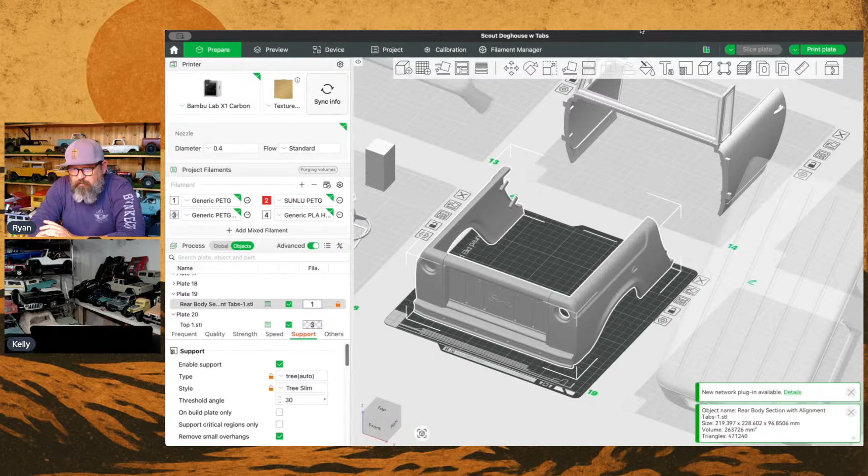I'm just going to start a print. You guys, let me configure this so I can share with you. Share screen. All right, cool. So you guys can see what I'm doing. Awesome. And it changes. So I'll be able to see your comments in a minute. This won't take me long to get it started.

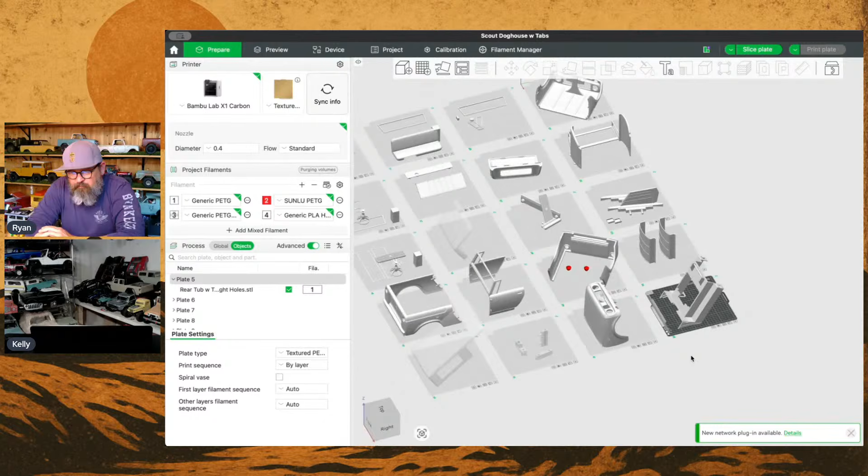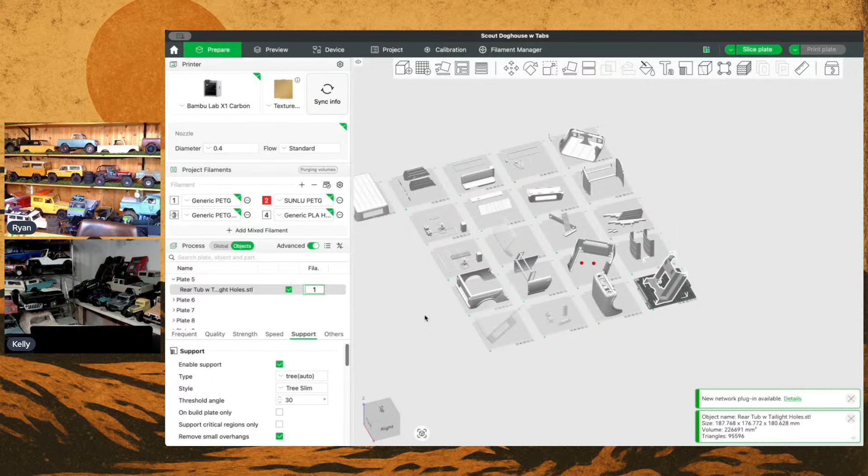And I've got this project all laid out. You can see what's happening. And this is what's next. It's this one. And I got it oriented the way I like it. And I'm going to check and make sure I'm on the material that I want, which is just regular PETG. And then I'll take you guys through the settings a little bit. On an interior piece like this, it's not as important, but you can see when Kelly and I were talking about the orientation before, so you guys still can see what I'm doing.

Yes, awesome. So I've got all this opportunity to see what's going on. So if I look at, this is the plate that's selected. I've got the support set to tree, auto, slim. And one thing you want to do before you set off on a big, long print is see where you're at on all your stuff. So I'm just going to go look at quality real quick. 0.2 layer height, that's fine for this. And I'll look at my support here in a second. I'm not doing any ironing or anything crazy.

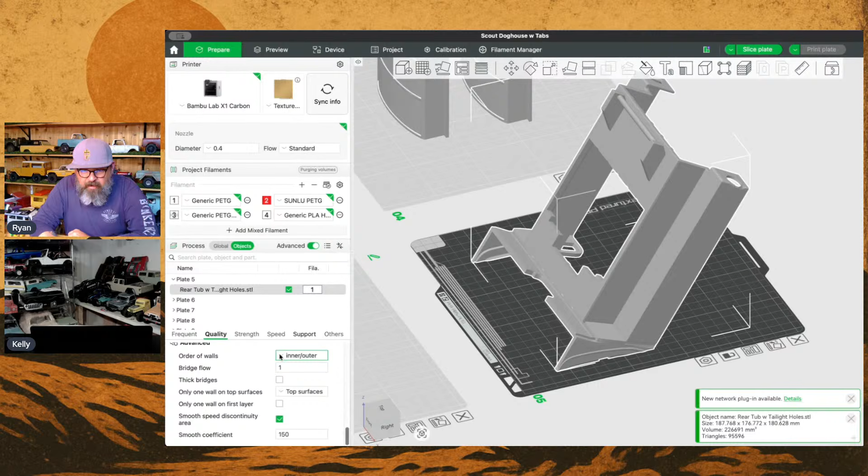I am going to change this from inner/outer to outer/inner. And I'm going to go to strength. And this is just me checking things out. And part of the strength is where you're also going to tell it what kind of infill you're going to want. And so I'm doing aligned rectilinear now. I used to do grid or this rectilinear here, but I'm doing aligned rectilinear now, and things seem to run smoother and a little faster. And that's the infill pattern, and the infill density is like the default 15, which is fine.

So I'm clicking off of this. I never mess with the speed. It does what it does. Wall loops of 2, wall thickness of 2 is plenty because that really is 2 on each side. So that's 4. I've done stuff where I've experimented with that and it makes it heavier if you add. So I don't need to do that. So yeah, I've looked at quality, strength. I don't really need to look at, but we will. And it's telling me what I want to know about the infill and the pattern that I've chosen.

There are some things like overhangs you can look at, but that's going to be in our other settings. There's so much you can do with these, but generally the defaults are fine. So support right here: tree, tree slim, remove small overhangs, support critical regions only. There's all kinds of stuff you can click here.

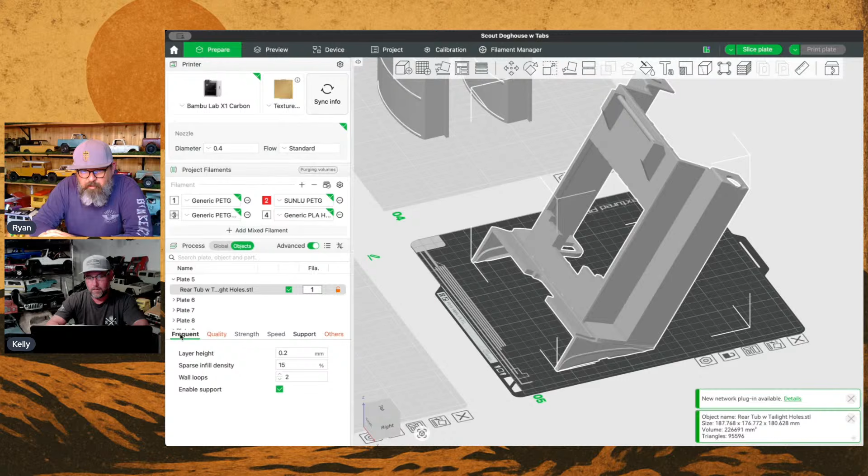So wall loops 2. I've done enough stuff that it gives me my own little tab now, stuff you can look at. But yeah, so this is ready to rock. I already know it is because I've printed multiples of these. That's what's kind of nice about the project and having it like it is. So we've talked about this before, but I could generate 2 different kinds of supports and see how much it's going to cost me in time and money. And we'll do that just for giggles.

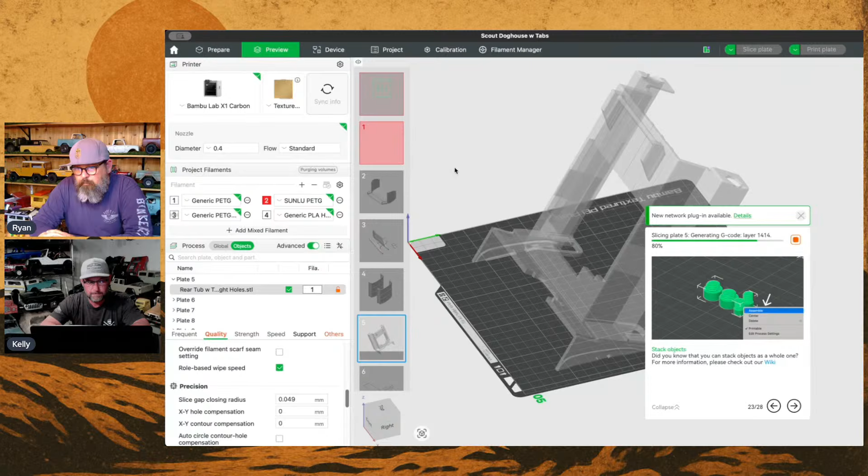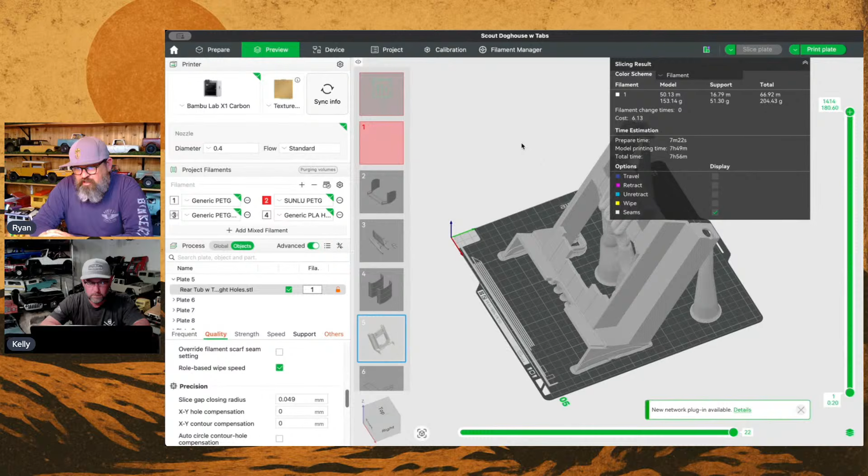Because of AMS and multiple reels of filament in here, I'm able to map out the filaments if I want. So this piece is $6, 8 hours. And I'm using trees, and trees seem to be just fine most of the time. Now, sometimes if you're having trouble with bed adhesion, I will do the other types of support because it will hold it better, but you also are fighting a heat soak sometimes as well, that depending on what's going on could distort the print. So, all right, remember that: $6, 8 hours.

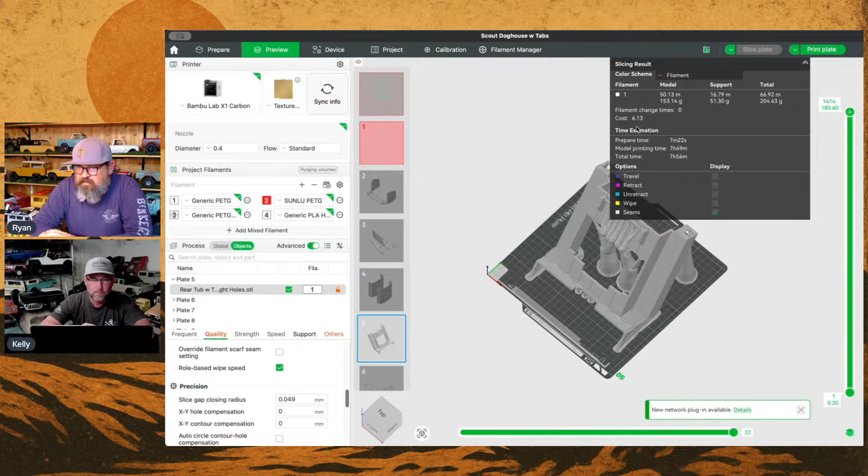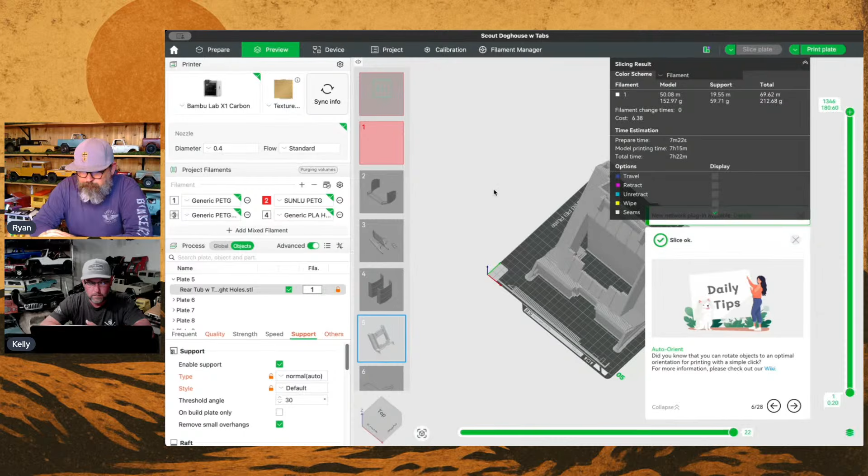Now let's go real quick and just run a different kind of support just for giggles and see what the change is. So we'll just go normal and then run it again, preview, and it's going to tell me what it cost me in time and money. Sometimes you want that and sometimes you don't. It's less time and the same money. It's only off by 20 cents on the money. I'm going to let it do it this way.

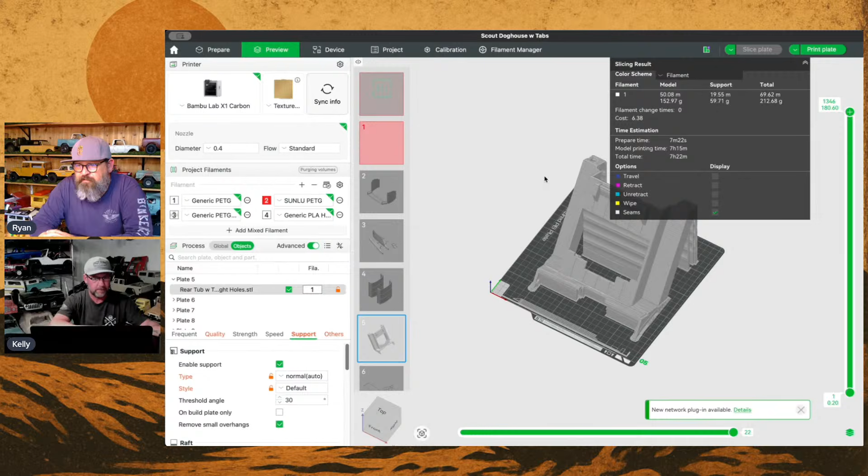Because when you do this, crunching the numbers, and it doesn't seem to make much of a difference, I tend to default to the straight lines of it all because I think it's easier on the machine than doing a bunch of little circles. So when it doesn't make a difference, that's what I'm going to do. So we're going to send it. There it is. Everything's mapped out right. Slot number 1, generic PETG. The AMS says the same thing.

You guys have seen me unclog my nozzle and clean out my extruder. It's when I'm in a hurry and I didn't make sure those things matched. But that's my fault. Okay. So that's that. There it is. Pretty cool. What was the time difference between the trees and the straight? 30 minutes. I agree with you.

I mean, there's times that I feel like I need to do more straight line supports just because of the trees, because my bed is constantly up, down, up, down. And when it gets up close to the end of the print and there's a ton of those little itty bitty round circles, your machine's working like crazy. Yeah, it's almost easier to do the straight line. Anytime I've had trouble with bed adhesion, I've gone for that straight stuff.

Yeah. And I'll put the brim on it, and you can control the size of the brim. But that's about it. That's about all you got to do. Yep. All right, so now Ryan can go get in his La-Z-Boy chair and watch it run for 7 hours.

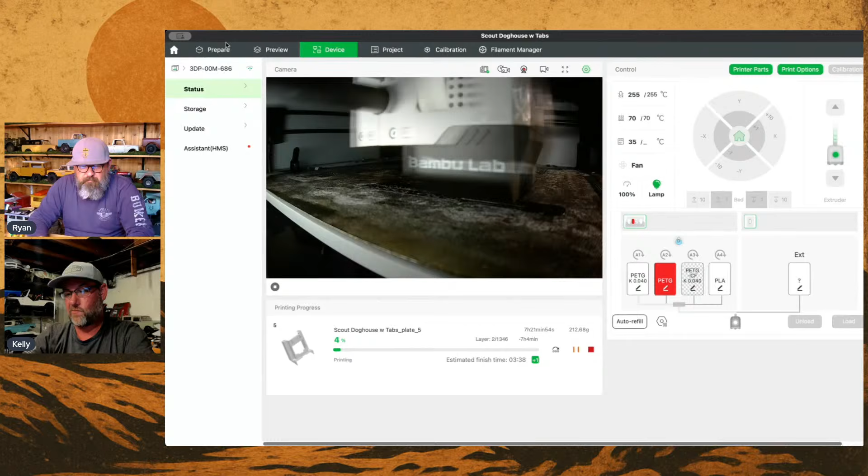There it is. Yeah, Michael Bird teal. That's what I'm saying. For the price of this, you're better off at this point to buy the white and paint it. Well, that's the thing. Once you find what you like, then you can get a case. Right. I do like this frosted water blue, it's kind of cool. It's the last one I held up. Yeah, that is cool. That's a little Corvair-ish looking to me. I think that's a little old school Scout looking with a white top or a black top.

All right, just because you got me hooked on this Michael Bird brand. I can check the printer no matter where I'm at. I got the Bambu Handy app on my phone, and I can stop it, start it, look at it anywhere. Pretty nice. Bambu Labs.

Bambu Labs, y'all. I've been looking at those again, and the difference between the H2D and the H2, I forget the other letter, is the nozzles. The H2D nozzles are more affordable. By the way, after 2,200 hours, I'm still on my first two nozzles, hot ends. I just go back and forth. One gets clogged, I fix it when I get to it, and put in the clean one. I've figured out how to clean them pretty good, which is crazy, because stuff's melted in there. Get out as much as you can before you press the rest out.